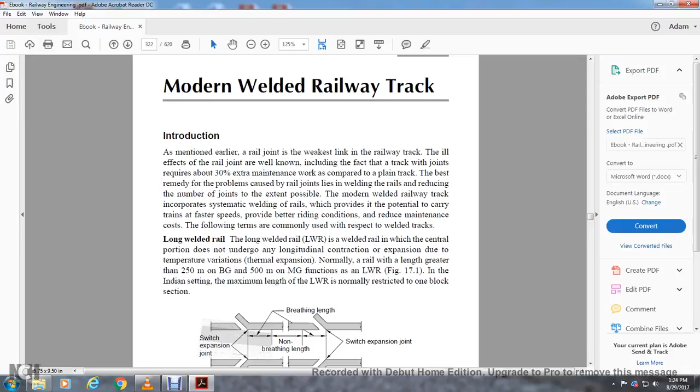Chapter 17, Modern Welded Railway Track.

Introduction. As mentioned earlier, the rail joint is the weakest link in the rail track, and the track with joints requires 30% extra maintenance work compared with the plain track.

The best remedy for the problems caused by rail joints lies with the welding of rails, which reduces the number of joints and incorporates systematic welding of rails, providing the potential to carry trains faster and provide better riding conditions.

This reduces maintenance cost. The following terms are commonly used with respect to welded tracks: Long Welded Rails, or LWR.

A Long Welded Rail is a welded rail whose central portion does not undergo any longitudinal contraction or expansion due to temperature variations or thermal expansion.

Normally, a rail length greater than 250 meters on broad gauge or 500 meters on meter gauge functions as a long welded rail. In the Indian setting, the maximum length of the long welded rail is normally restricted to one block section.

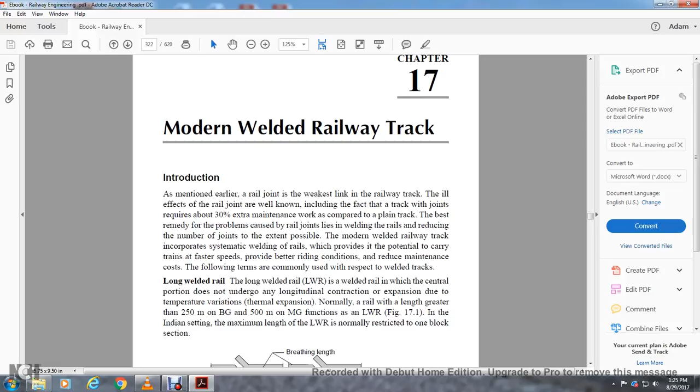Figure 17.1 shows the long welded rail, switch expansion joint, total length of the long welded rail, non-breathing length, breathing length, and switch expansion joint.

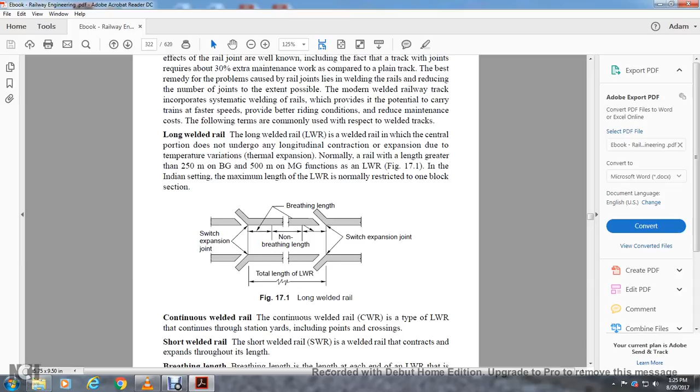Continuous Welded Rails, CWR, is a type of long welded rail that continues through station yards, including points and crossings. Short Welded Rails, or SWR, is welded rail which contracts and expands throughout its length.

The breathing length is the length at each end of the long welded rail that is subject to expansion and contraction on account of variations of temperature.

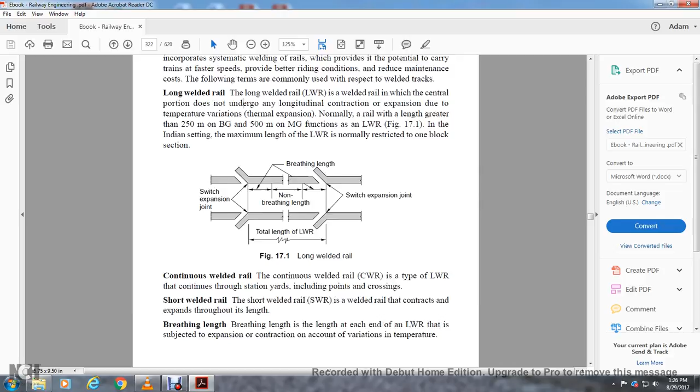Anchor length. The anchor length is the length of track that is required to resist the pull exerted by the rail tensor on the rails.

Switch Expansion Joint, or SEJ, is the expansion joint provided at the end of the long welded rail to permit the expansion and contraction of the adjoining breathing lengths due to temperature variation.

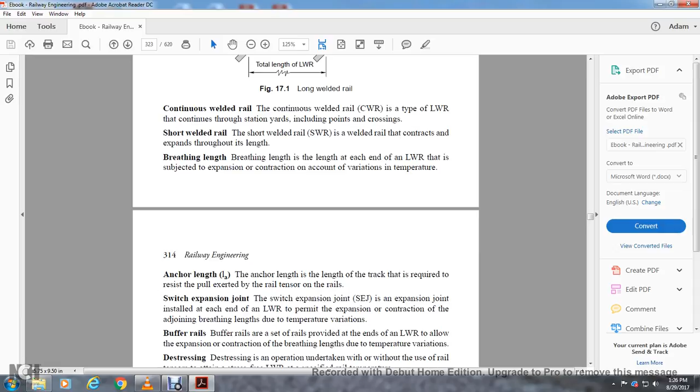Buffer rails are set rails provided at the end of the long welded rail to allow the expansion and contraction of the breathing length due to temperature variation.

Destressing is an operation undertaken, with or without using rail tensors, to attain stress-free long welded rails at a specified rail temperature.

Rail temperature: the temperature of the rail is recorded by an approved rail thermometer, at the site, different from the ambient or atmospheric temperature as reported by the meteorological department.

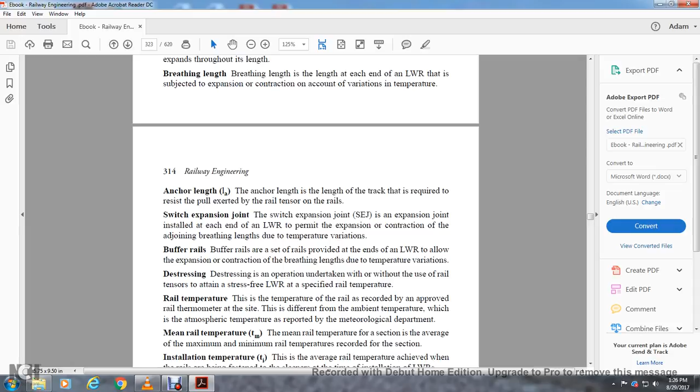Mean Rail Temperature, TM, means the rail temperature of the section, the average of the maximum and minimum rail temperatures recorded in the section. Installation Temperature is the average rail temperature achieved when the rail is fastened to the sleepers at the time of installing the long welded rail.

Standard Installation Temperature, or TS, is the installation temperature set at the standard gap of 6 millimeters provided at the fish joint plate.

Prevailing Rail Temperature, TP, is the average prevailing temperature of the rail at the time any operation connected with destressing is being carried out.

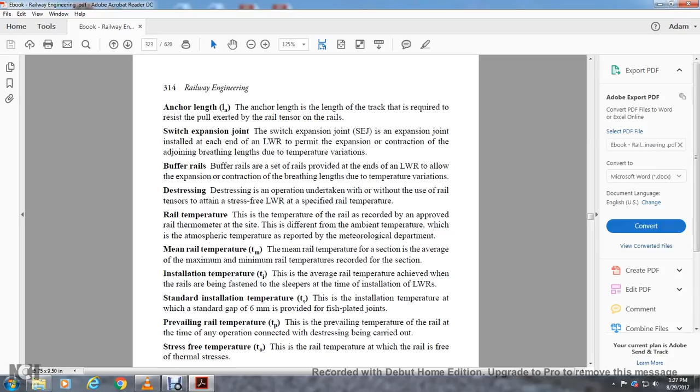Stress-Free Temperature, TO, is the rail temperature at which the rail is free of thermal stress.

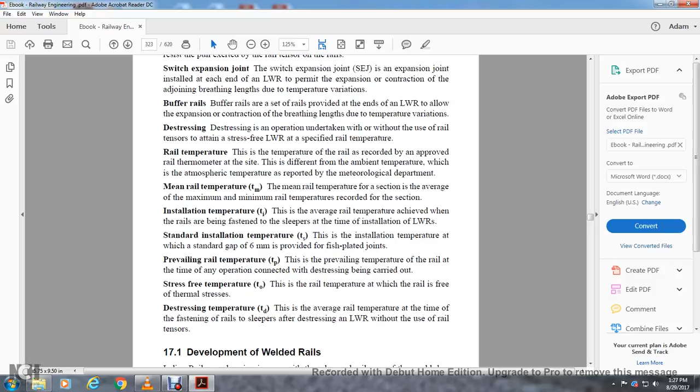Destressing Temperature, TD, is the average rail temperature at the time of fastening the rail to the sleeper during the destressing of the long welded rail without using rail tensors.

17.1 Development of Welded Rails.

Indian Railways, keeping pace with advanced railways of the world, adopted welded rails. Over the last few decades, development of welded rails has been necessary due to economical considerations coupled with the technical advantages of welded rail.

The fish-plated track with rails was initially welded in panels of 3, 5 and 10 rails. This development is called Short Welded Panels, or SWPs, or Short Welded Rails, SWRs.

This first stage of the development of welded rails continued, and in the course of time there was considerable achievement in track technology, and a new concept of locking up the stress of the rail, thereby resisting any change in the length of the rail, was developed.

According to this, long welded rails of varying length up to 1 kilometer were laid, eliminating rail joints to make the most of the advantage that welding offers.

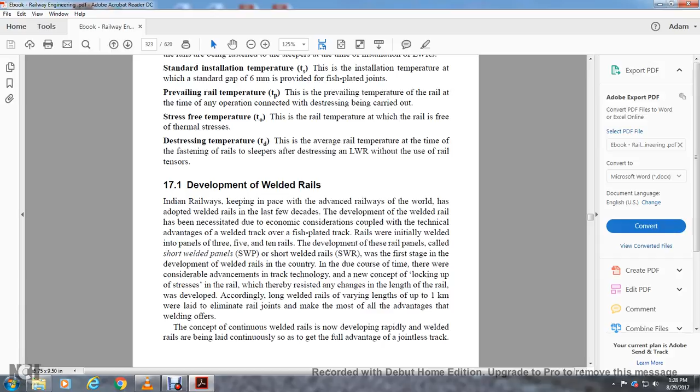The concept of continuous welded rails was then developed, and rapidly welded rails are being laid continuously so as to get the full advantage of the jointless track.

Theory of the long welded rails. It is well known that metal expands and contracts with the degree of temperature, undergoing thermal expansion. Rail expands and contracts depending on the variation of temperature.

Expansion of the rail is a function of the coefficient of linear expansion of the rail material, the length of the rail, and the variation of rail temperature. Normally a free rail will undergo alteration of length corresponding with the variation of temperature, but as the rail is fastened to the sleepers, which in turn are embedded in the ballast, this restraint on thermal expansion gives rise to locked-up thermal stress in the rail metal.

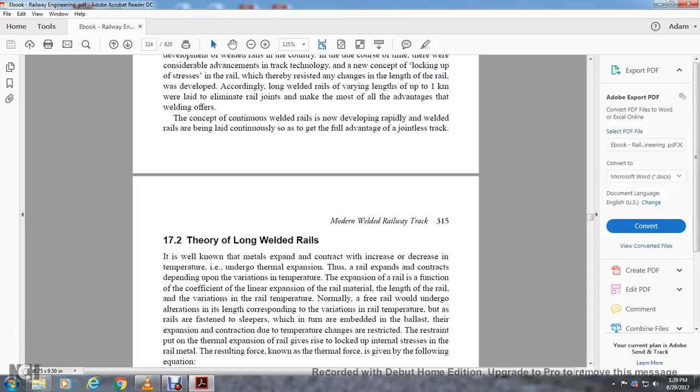The resulting force, known as the thermal force, is given by the equation P equals E times A times T. P is the force in tons. E is the modulus of elasticity of rail steel, 2.15 times 10 to the 6 kilograms per centimeter squared, or 2150 tons per centimeter squared. A is the cross section of steel in centimeters squared, which for a rail of 52 kilograms per meter is...

66.15 centimeters squared. alpha is the coefficient of linear expansion, 0.00001152 per degree Celsius, with temperature given in Celsius.

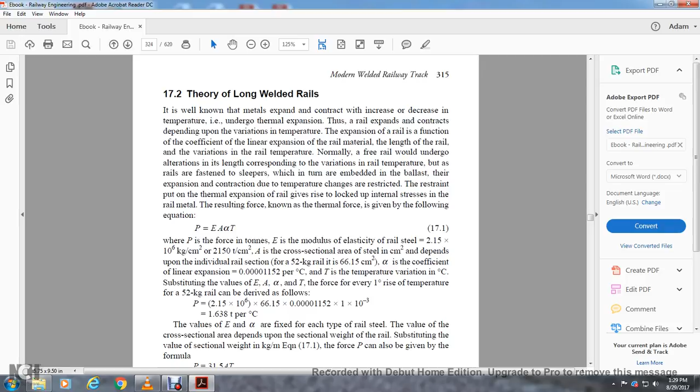Substituting the values of E and A, and T, the force for every 1 degree rise of temperature for a 52 kilogram rail can be derived as 1.638 tons per degree Celsius.

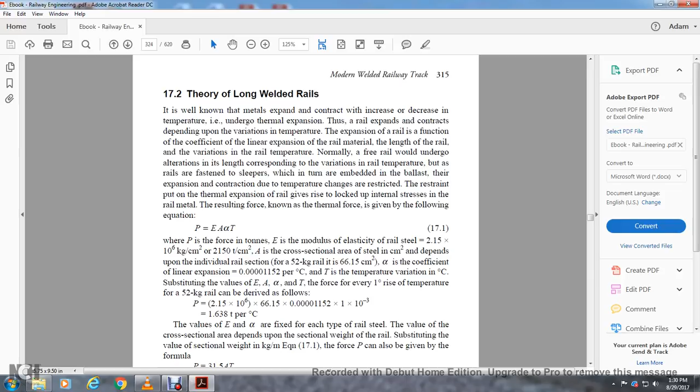Where P is the force in kilograms, A is the section weight in kilograms per meter, and T is the temperature variation in degrees Celsius, you get 1.638 tons per degree Celsius.

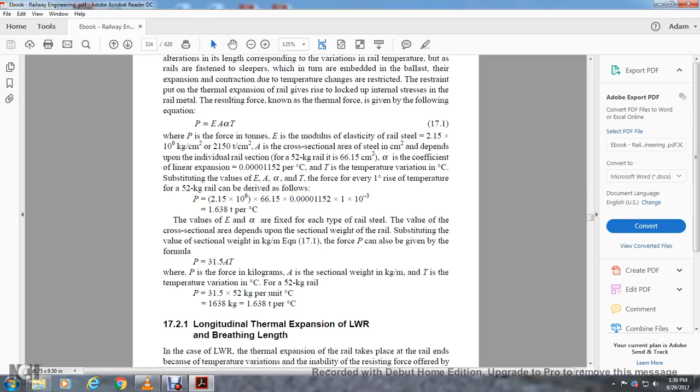Longitudinal thermal expansion of the long welded rail and breathing length. In the case of a long welded rail, thermal expansion of the rail takes place at the rail end because of temperature variation and the inability of the resisting force of the rail and ballast to overcome the same.

The long welded rail continues to expand at its ends up to a particular length, with adequate resisting force developed toward the center of the stretch, until it finally reaches the particular length at its end where the resistance of the track structure becomes equal to the thermal forces created as a result of the temperature variation.

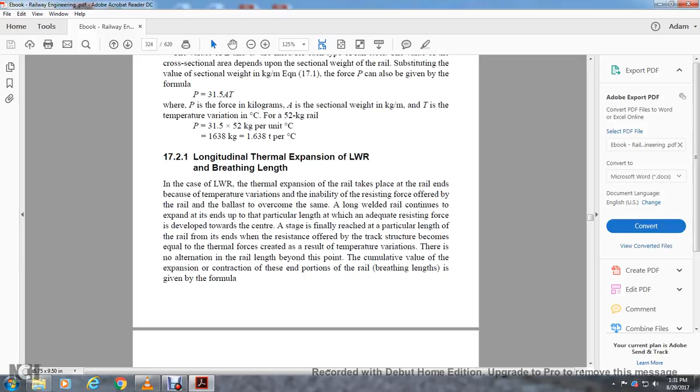delta L equals L times A times T divided by 2, where delta L is the amount of expansion or contraction of the rail, L is the breathing length of the rail, alpha is the coefficient of thermal expansion of the rail, and T is the variation in temperature.

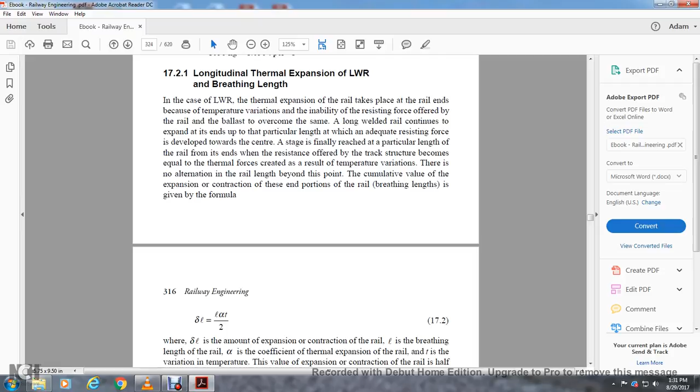The value of expansion or contraction of the rail is half the value that would have been attained by the rail if it had been free to expand without the ballast resistance.

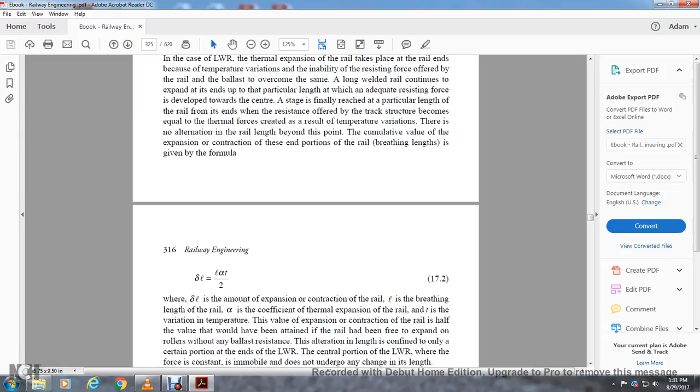Alteration of length is confined to only certain portions of the long welded rail; the center portion of the long welded rail, where the force is constant, is immobile and does not undergo any change in length.

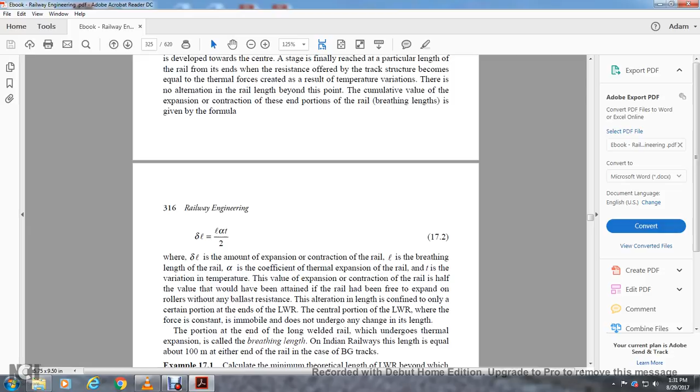The end portion of the long welded rail which undergoes thermal expansion is called the breathing length. On the Indian Railways, this length is equal to about 100 meters at either end of the rail in the case of broad gauge tracks.

Alright, example 17.1. Calculate the minimum theoretical length of the long welded rail beyond which the center portion of the rail will not be subject to thermal expansion, given the following data.

The cross-sectional area of the 52 kilogram section is 66.15 centimeters squared. The coefficient of thermal expansion of rail steel is 11.5 times 10 to the negative 6 per degree Celsius, for a temperature variation of 30 degrees Celsius. The modulus of elasticity of rail steel is 2 times 10 to the 6 kilograms per centimeter squared.

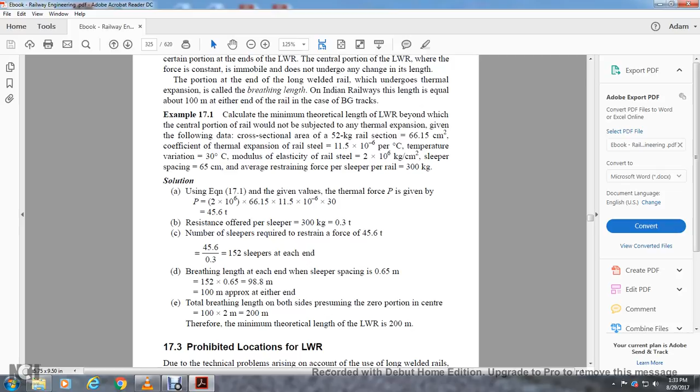The total breathing length for both sides, presuming a zero-movement portion in the center, is 100 times 2 meters, which is 200 meters. Therefore, the minimum theoretical length of the long welded rail is 200 meters.

Section 17.3: Prohibited locations for long welded rail. Due to technical problems arising from the use of long welded rails, the Indian Railway has specified locations where laying long welded rail is prohibited. These locations are listed below.

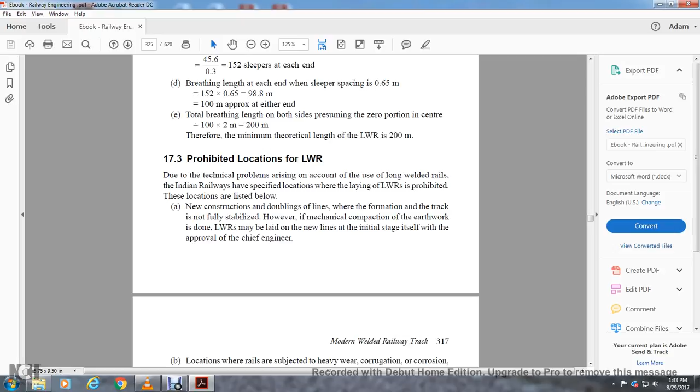A. New construction or doubling lines where the formation of the track is not fully stabilized. However, with mechanical compaction of the earthwork is done, long welded rails may be laid on new lines in the initial stage, itself with the approval of the chief engineer.

B. Locations where rails are subject to heavy wear, corrugation, or corrosion requiring frequent renewal. Locations with weaker formation, where track deformation could lead to buckling. Locations with formation susceptibility to pumping of ballast likely to get heavily contaminated, thereby necessitating frequent opening of the track, the screening of the ballast.

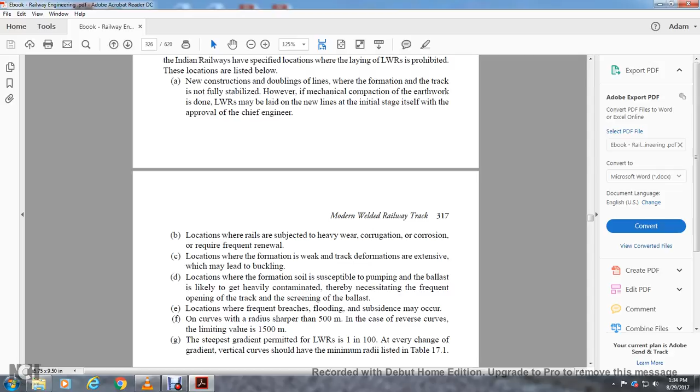The steepest gradient permitted for the long welded rail is 1 in 100, and every change of gradient vertical curve should have the minimum radius given in table 17.1.

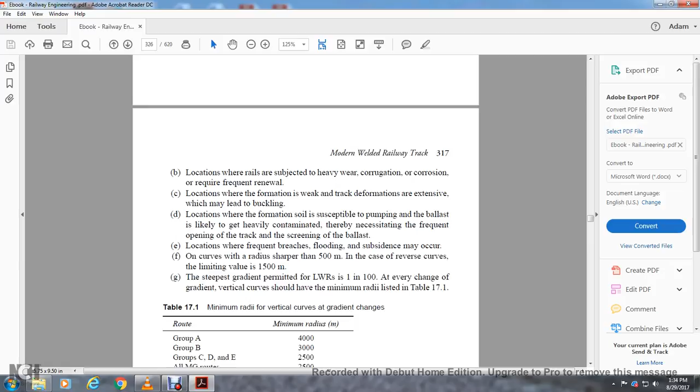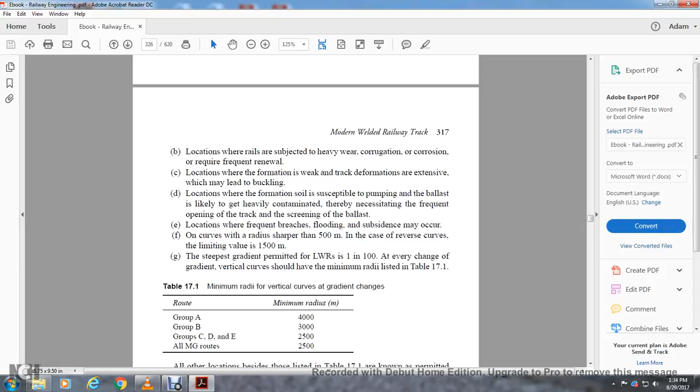Group A has a minimum radius of 4,000 meters. Group B has a minimum radius of 3,000 meters. Groups C, D, and E have a minimum radius of 2,500 meters, and all meter gauge routes have a minimum radius of 2,500 meters.

Section 17.4: Track structure of a long welded rail. The minimum length required for the rail's functioning as a long welded rail depends upon the range of temperature variation.

Normally a rail length of about 100 meters on broad gauge and 150 meters on meter gauge is subject to thermal expansion within the rail. A length of more than 200 meters on broad gauge and 300 meters on meter gauge is generally necessary for it to function as long welded rail.

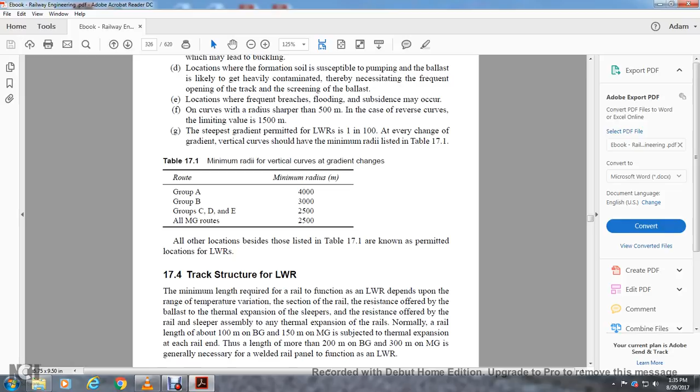Panel functioning is limited as long welded rail. Section 17.4.1: Formation. The formation should not pose any problems with the long welded rail.

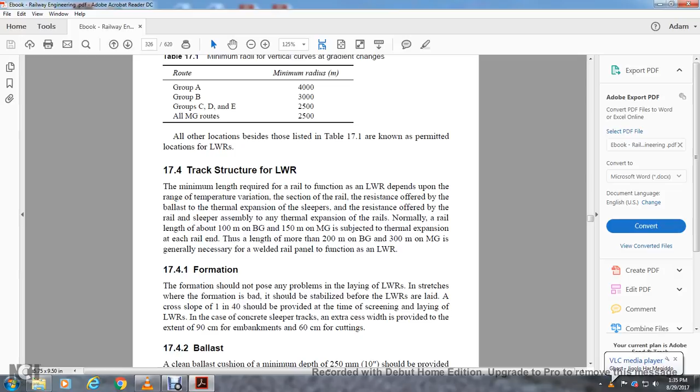Stretches where the formation is bad: if the formation is bad, it should be stabilized before the long welded rail is laid, as a cross slope of 1 in 40 should be provided at the time of screening for the long welded rails. In case of concrete sleeper tracks, extra width should be provided to the extent of 90 centimeters for embankments and 60 centimeters for cuttings.

Section 17.4.2: The ballast. A clean ballast cushion of minimum depth of 250 millimeters, or 10 inches, should be provided at the bottom of the sleeper for long welded rails in order to increase resistance.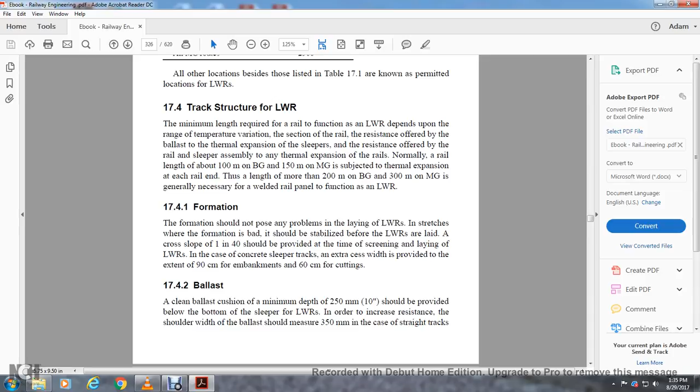The shoulder width of the ballast should be measured at 350 millimeters for straight tracks, and on the inside of a curve 500 millimeters. On the outer end of the curve, the ballast shoulder should be humped up to a height of 150 millimeters on both shoulders.

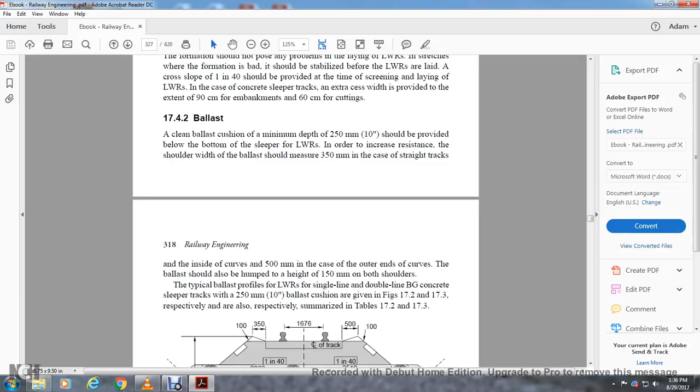Typical ballast profiles of long welded rail for single line and double line broad gauge concrete sleeper tracks with 250 millimeter (10 inch) ballast cushion construction are shown in figures 17.2 and 17.3, summarized in tables 17.2 and 17.3 respectively.

Figure 17.2 shows the ballast profile of a single line long welded rail track, all dimensions in millimeters: 6,100 millimeters from embankment to embankment, and 5,490 millimeters for cutting.

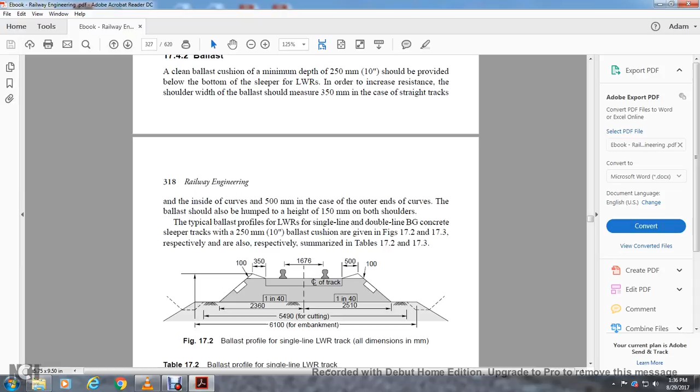2360 and 2510, 1 in 40, 100 millimeters, 100 millimeters, 350 millimeters from the sleeper, 1676 from the inside gauge of the track, 500 millimeters off the end of the track, 100 millimeter slope. Ballast profile, single line, broad gauge, wood and steel, concrete, wood, meter gauge, ST, CST/9, and concrete.

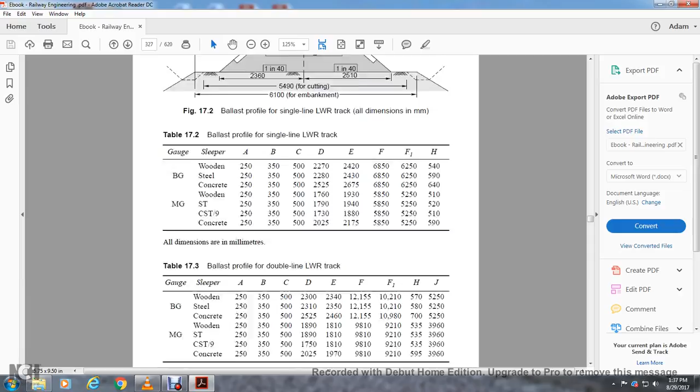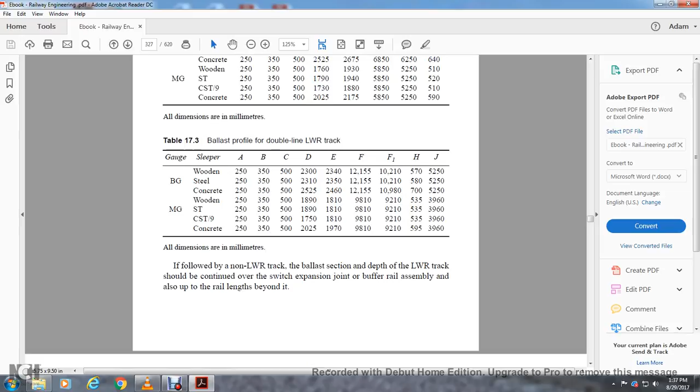17.3: ballast profile, double line, welded track, broad gauge, wood, steel, concrete, wood, and meter gauge, ST, CST/9, and concrete. If followed by a non-long welded rail track, the ballast section at the ends should be continued over the switch expansion joint, buffer assembly, and also up to the rail lengths beyond it. 17.3 shows the ballast in millimeters for a double line long welded rail track, 10,210 millimeters embankment.

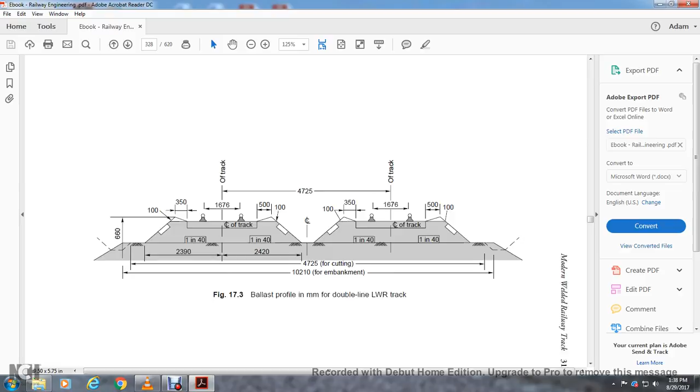17.4.3 Sleepers prescribed in long welded and continuous welded rail. Sleepers prescribed in the long welded rail and continuous welded rail are listed below.

Broad gauge concrete sleepers with elastic fittings, untreated or hard (U category) wooden sleepers with fastening, for speeds not exceeding 160 kilometers an hour. Steel trough sleeper with elastic fitting for speeds not exceeding 130 kilometers an hour, as a measure up to 160 kilometers an hour. However, the interim measure permits steel sleepers with loose jaw keys and untreated wooden sleepers. The CST sleeper is also permitted.

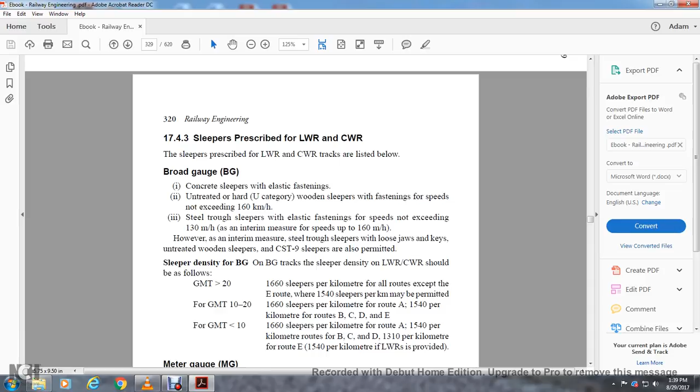Sleeper density of the broad gauge track for long welded rail and continuous welded rail is as follows: greater than 20 gross million tons, 1,660 sleepers per kilometer. All routes except E route, 1,540 sleepers per kilometer may be permitted. For gross million tons from 10 to 20, 1,660 sleepers per kilometer for route A, 1,540 per kilometer for routes B, C, D, and E. Less than 10 gross million tons, 1,660 sleepers per kilometer for route A, 1,540 for routes B, C, and D, 1,310 per kilometer for route E, 1,540 per kilometer if long welded rail is provided.

Meter gauge: the prescribed sleepers for meter gauge are concrete sleepers, steel troughs, durable wooden sleepers, and CST9 sleepers. For sleeper density on meter gauge, a meter gauge track should have 1,540 sleepers per kilometer standing at 100 kilometers per hour, with 1,660 sleepers per kilometer for speeds above 100 kilometers an hour, for existing long welded and continuous welded rail.

The decision of retaining the existing sleeper density is taken by the Chief Engineer.

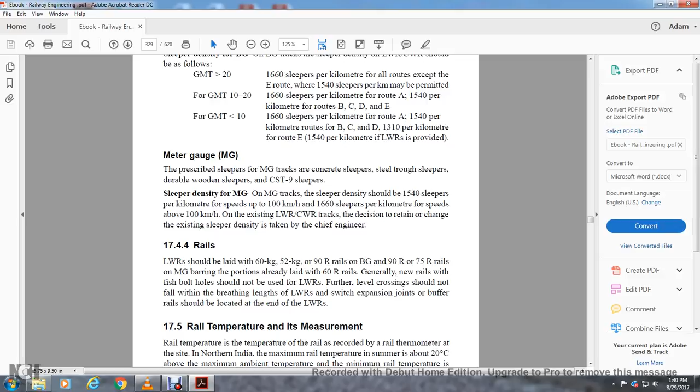17.4.4 Rails. Long welded rails should be laid with 60 kg, 52 kg, or 90R rails for broad gauge, and 90R, 75R, or S55 rail for meter gauge, barring the portion already laid with 60R rails. Generally, new rails with fishbolt holes should not be used in long welded rail. Further, level crossings should not be provided within the breathing length of the long welded rail. Switch expansion joints and buffer rails should be located at the ends of the long welded rails.

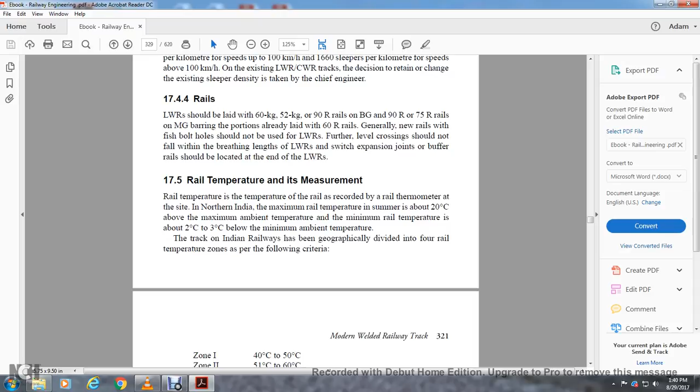17.5 Rail temperature measurement. The rail temperature is recorded with a rail thermometer. The maximum rail temperature in northern India in summer is about 20 degrees Celsius above the maximum ambient temperature. The minimum rail temperature is about 2 to 3 degrees Celsius below the minimum ambient temperature. The Indian rail track is geographically divided into 4 rail temperature zones according to the following criteria.

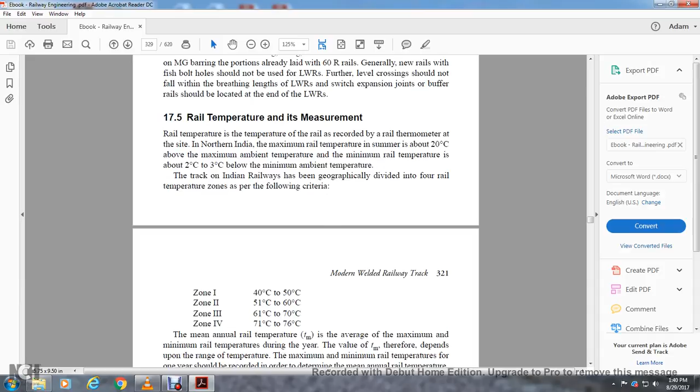Zone 1: 40 to 50 degrees Celsius. Zone 2: 51 to 60 degrees Celsius. Zone 3: 61 to 70 degrees Celsius. Zone 4: 71 to 76 degrees Celsius.

The annual rail temperature (TM) is the average of the maximum and minimum rail temperature recorded during the year, and its value depends upon the temperature range. The maximum and minimum rail temperatures for one year should be recorded to determine the annual rail temperature, although a record of 5 years is preferable. Rail thermometers are used to measure rail temperature. The different types of thermometers available on Indian railways are: embedded type, dial type, and continuous recording type. The most commonly used among these is the embedded type thermometer.

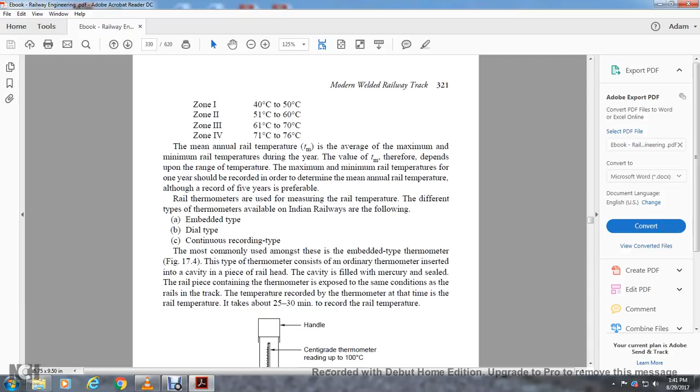The embedded type thermometer consists of the ordinary thermometer inserted into the cavity of a piece of rail head. The cavity is filled with mercury and sealed. The rail piece containing the thermometer existing in the same conditions as the rail track. This thermometer records the rail temperature, and it takes about 25 to 30 minutes to record it.

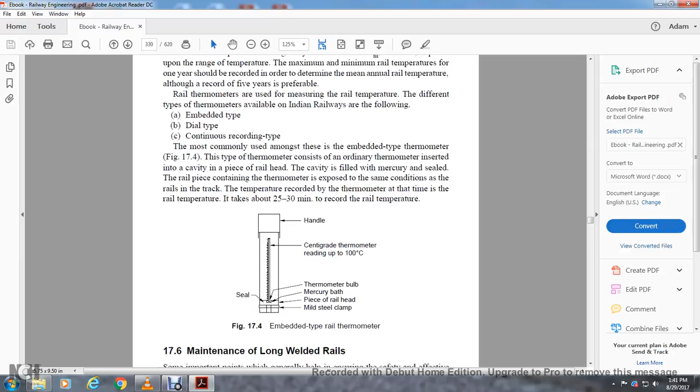Figure 17.4 shows the embedded type of rail thermometer. The thermo bulb is sealed in a mercury bath in a piece of rail head made of mild steel, centigrade, with the thermometer reading up to 100°C in the handle.

Now for maintenance of long welded rails. Some important points for ensuring the safety and effective maintenance of long welded rails are as follows: a well-compacted ballast bed should be available below the sleepers to give adequate lateral and longitudinal resistance to the track, in order to prevent buckling or excessive alteration of sleeper spacing in the long welded rail.

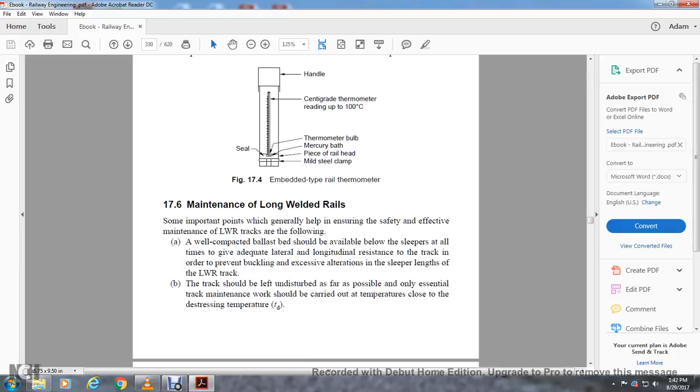The track should be left undisturbed as far as possible. Only essential track maintenance work should be carried out at temperatures close to the de-stressing temperature.

The track should preferably be maintained mechanically with on-track tamping machines. At no time during manual maintenance should more than 30 sleeper spaces be open in a continuous stretch, between two stretches of 30 sleeper length that are fully boxed.

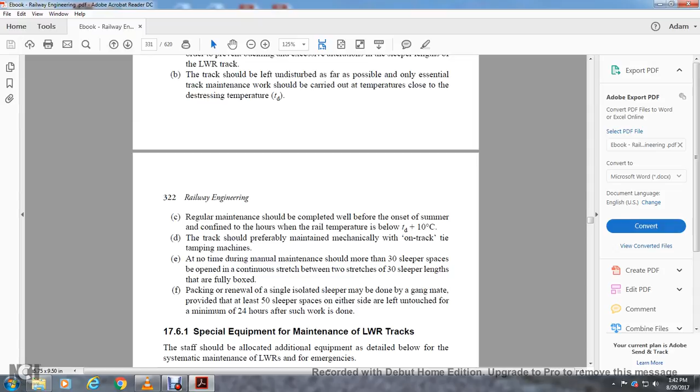Packing or renewal of a single isolated sleeper may be done by a gang mate, provided at least 50 sleeper spaces on either side are left untouched for a minimum of 24 hours after such work is done.

17.6.1 Special equipment for maintenance of long welded rail. Staff should be provided with additional equipment detailed below for systematic maintenance of long welded rail, for emergencies and additional equipment of the gang.

The prepared jaw fish plate with a special clamp, 30mm long weld closure space, rail thermometer marked with the temperature range, and special 1 meter long fish plate with clamps.

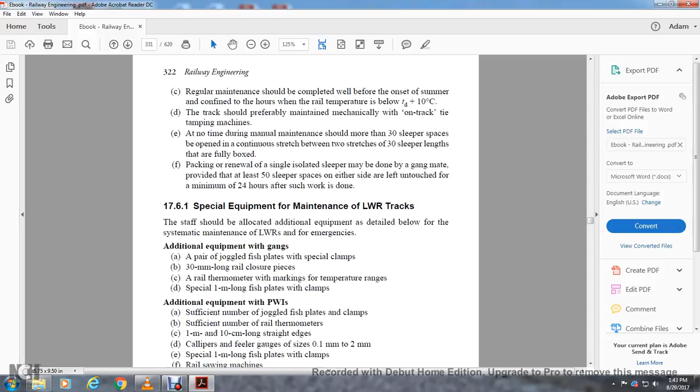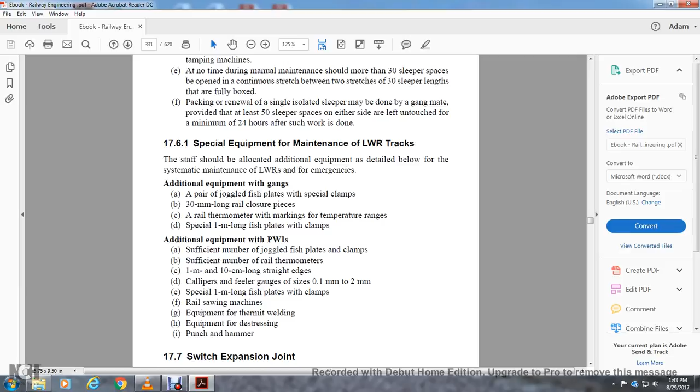Additional equipment for PWIs, the Permanent Way Inspectors, includes a sufficient number of joggled fish plates and clamps, sufficient number of rail thermometers, 1m, 10cm long straight edge caliper, feeler size gauge of 0.1mm to 2mm, special 1 meter long fish plates with clamps, rail sawing machines, equipment, thermite welding equipment, de-stressing, punching, and a hammer.

17.7 Switch expansion joint. The switch expansion joint is a device installed with a long welded rail to allow thermal expansion, presuming a breathing length of 100 meters on broad gauge track.

For a maximum temperature variation of plus or minus 35 degrees Celsius from the mean temperature over the breathing length, would shift or move by approximately 20 plus or minus millimeters from its mean position.

The expansion joint design accommodates a total length modification of plus or minus 60 millimeters. An extra allowance has been made to account for factors such as fractures in the rail.

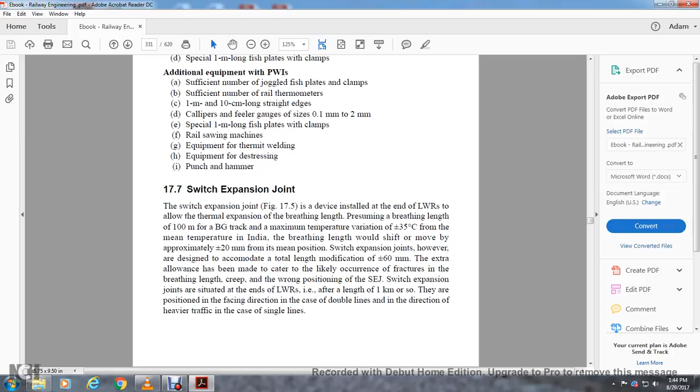Figure 17.5 shows the switch expansion joint, with the welded gapless joint, the mean position of the tongue rail, the mean position of the stock rail, and the reference rail post.

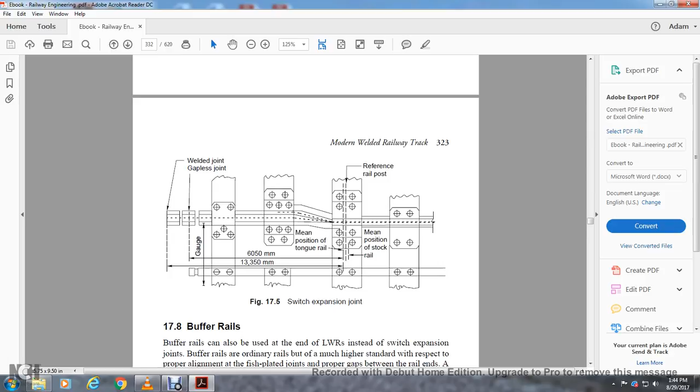17.8 Buffer rail. Buffer rails can also be used at the end of a long welded rail instead of a switch expansion joint. The buffer rails are ordinarily laid to a much higher standard with respect to proper alignment, with fish-plated joints.

A proper gap is maintained between the rail joint ends, with a gap of 7.5 millimeters left at each end of the buffer joint. The ends of the buffer rails should be even against each other, to permit free thermal expansion and contraction of the buffer.

The rails are laid on wooden sleepers with MS canted bearing plates, 22 millimeters diameter rail screws, with the portion of the long welded rail that bears, and the buffer rail should be maintained by measured shovel packing.

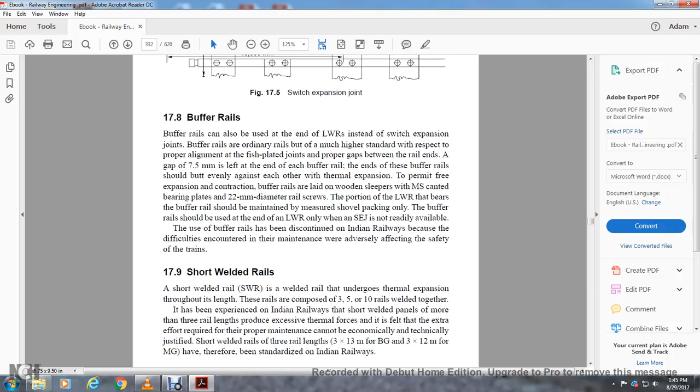Buffer rails should only be used at the end of long welded rail when a switch expansion joint is not readily available.

The use of buffer rails, has been discontinued on Indian Railways, because of the difficulties encountered with their maintenance, would adversely affect the safety of the train.

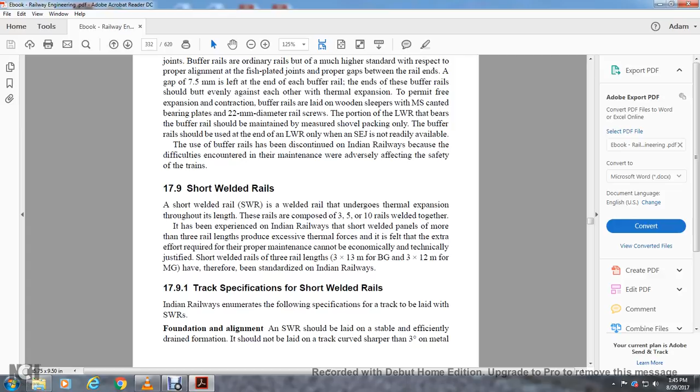Short welded rails (SWRs) are welded rails that undergo thermal expansion throughout their length, encompassing 3, 5, and 10 rails welded together. Expansion of short welded panels of more than three rail lengths produces excessive thermal force. This effect requires proper maintenance but cannot be economically or technically justified. Short welded rails of 3 lengths - 3 times 13 meters for broad gauge, 3 times 12 meters for meter gauge - have been standardized on Indian Railways.

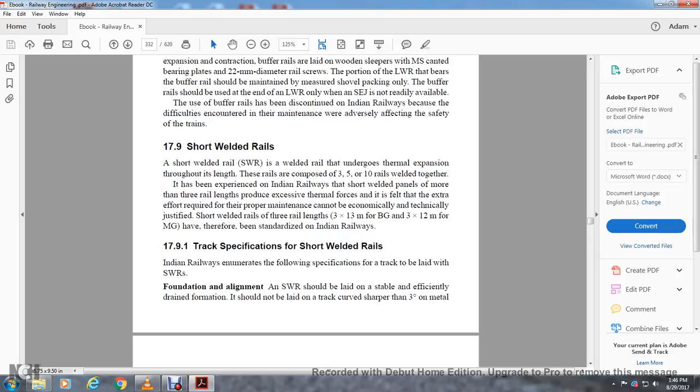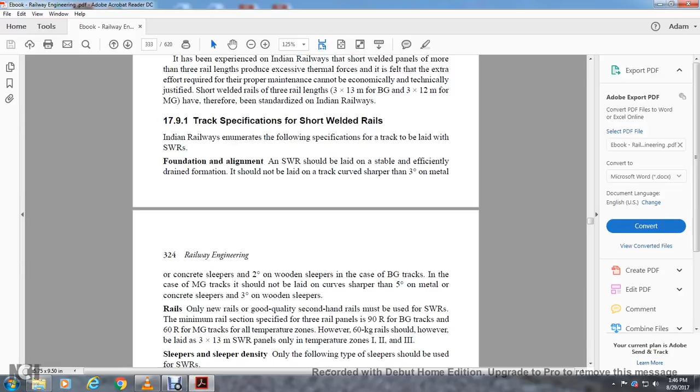Section 17.9.1 covers track specifications for short welded rails. Indian Railways enumerates the following specifications for track to be laid with short welded rails. The foundation alignment should be laid on a stable, efficiently drained formation, and should not be laid on curves sharper than 3 degrees on metal or concrete sleepers, or 2 degrees on wooden sleepers, for broad gauge track. For meter gauge track, it should not be laid on curves sharper than 5 degrees on metal or concrete sleepers, and 3 degrees on wooden sleepers.

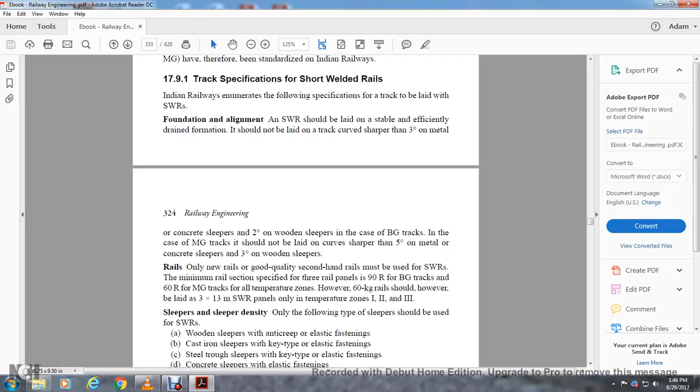Regarding sleeper density, one of the following types of sleepers should be used for short welded rails: wooden sleepers with anti-creep elastic fittings, cast iron sleepers with key-type elastic fittings, steel trough sleepers with key-type elastic fittings, or concrete sleepers with elastic fittings.

Wooden sleepers should preferably be used at all fishplated joints with short welded rails, or metal sleepers provided with MS bearing plates with non-anti-creep fastenings should be laid. The minimum sleeper density specified for broad gauge and meter gauge track is M+4, except for 60 kilogram rails on broad gauge track, which should be M+7.

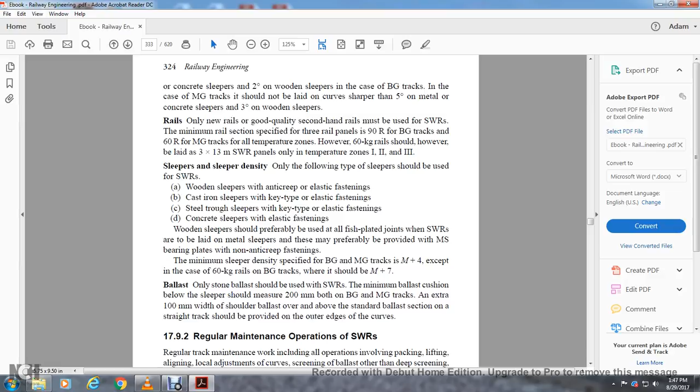For ballast, stone ballast should be used in short welded rail track. The minimum ballast cushion below the sleeper should be 200 millimeters for both broad gauge and meter gauge, with an extra 100 millimeter width of shoulder ballast, over and above the standard ballast section on straight track, provided on the outer edge on curves.

Section 17.9.2 covers regular maintenance operations on short welded track. Regular track maintenance work includes all operations involved in packing, lifting, and lining, with local adjustment of curves, and screening ballast other than deep screening.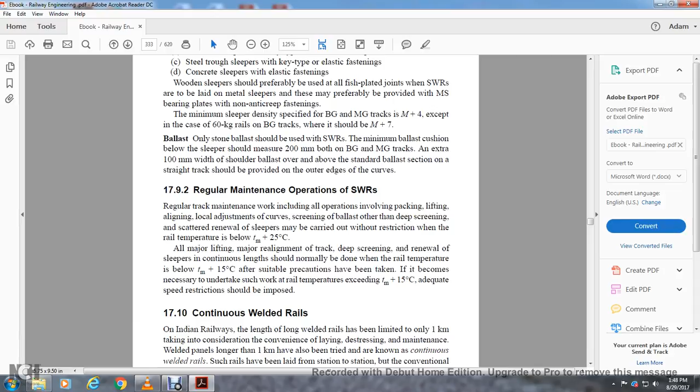Scattered renewal of sleepers may be carried out without restriction when the rail temperature is below TM plus 25 degrees Celsius. Major lifting, realignment of track, deep screening, or continuous sleeper renewal should normally be done when rail temperature is below TM plus 15 degrees Celsius. If, after suitable precautions, it becomes necessary to undertake such work at temperatures exceeding TM plus 15 degrees Celsius, adequate speed restrictions should be imposed.

Section 17.10 covers continuous welded rail. On Indian Railways, the length of welded rails has been limited to 1 kilometer, taking into consideration convenience of laying, destressing, and maintenance. Welded panels longer than 1 kilometer have also been treated as continuous welded rails. Such rails have been laid at stations, but conventional insulation joints and turnouts have been left out as isolated switches with expansion joints.

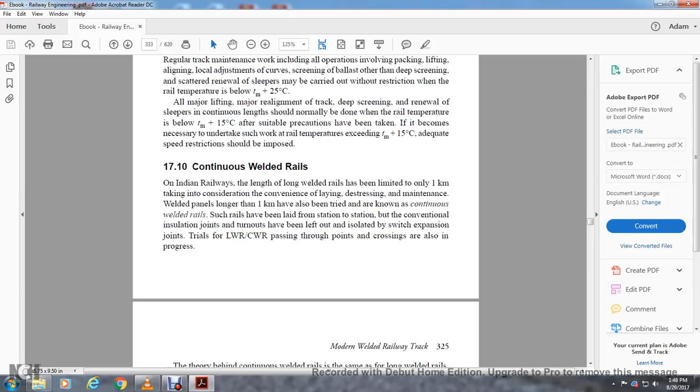Long welded rails and continuous welded rail passing through points or crossings also progress. The theory behind continuous welded rail is the same as for long welded rails. Once the concept of locking the longitudinal thermal force is accepted, there is no reason the length of the long welded rail should be limited to only 1 kilometer.

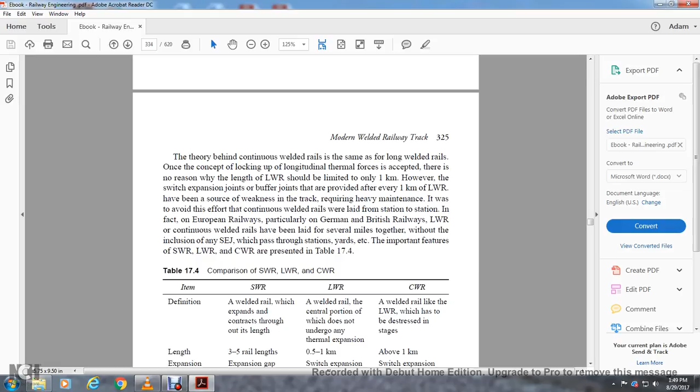Switch expansion joint buffer joints are provided every 1 kilometer of long welded rail to avoid the source of weakness requiring heavy maintenance from station to station. European railways, particularly German and British railways, have laid long welded rail and continuous welded rail for several miles together without switch expansion joints through station yards. This is an important feature of short welded rail, long welded rail, and continuous welded rail, covered in table 17.4.

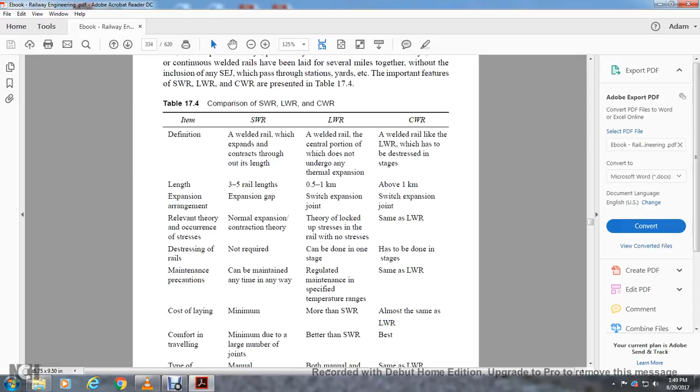1711, buckling of the track.

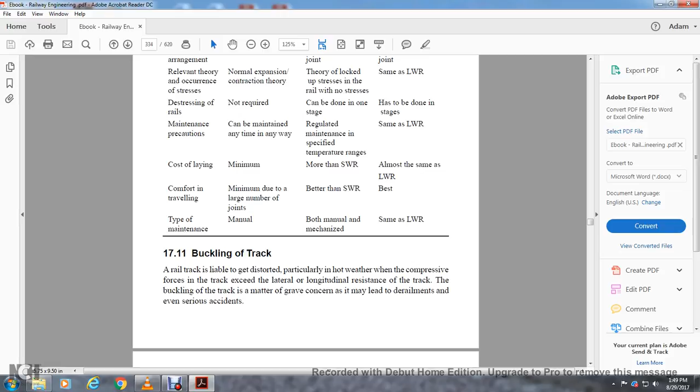Rail track is liable to distort, particularly in hot weather. The compressive force exerted on the rail versus the lateral resistance of the track is a measure of buckling, a grave concern that can lead to derailment or even serious accidents.

1711-1. Track can be buckled due to the following reasons: inadequate lateral resistance due to deficient ballast, ineffective or missing fastenings, and destressing or maintaining the track outside of the specified rail temperature range, especially in hot weather.

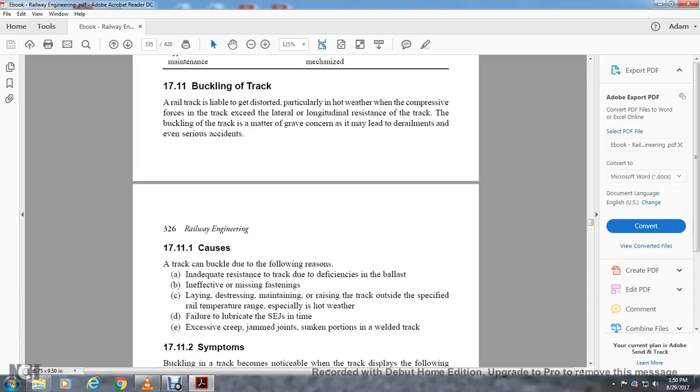Failure to lubricate the special switch expansion joints in time, and excessive creep at joints and sunken portions of the welded track.

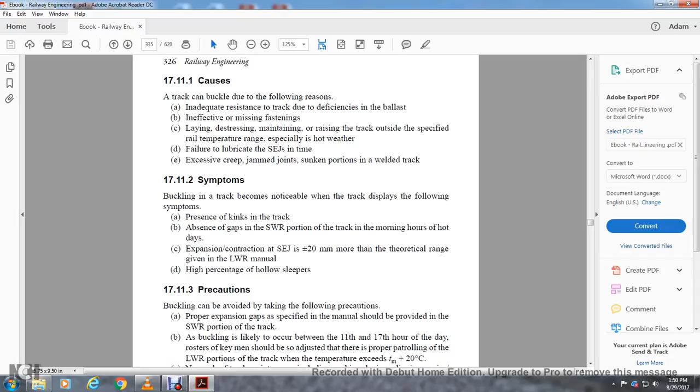1711-2. Buckling of the track may be noticed by the following symptoms: presence of a kink in the track, absence of gaps at short welded rail portions in the mornings, and expansion or contraction at switch expansion joints of plus or minus 20 millimeters more than the theoretical range specified in the long welded rail manual.

Buckling can be avoided by taking the following precautions: proper expansion gaps as specified in the manual should be provided at short welded rail portions of the track.

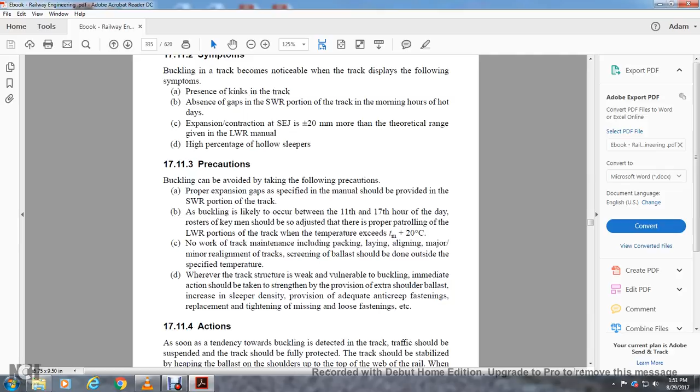Wherever the track structure is vulnerable to buckling, extra measures should be taken such as strengthening provisions, extra shoulder ballast, increasing sleeper density, providing adequate anti-creep fastenings, and replacing or tightening missing or loose fastenings, etc.

1711-4, actions. As soon as a tendency towards buckling is detected in the track, traffic should be suspended and the track should be fully protected. The track should be stabilized by heaping ballast shoulder up to the top of the web of the rail. When buckling takes place, traffic should be suspended.

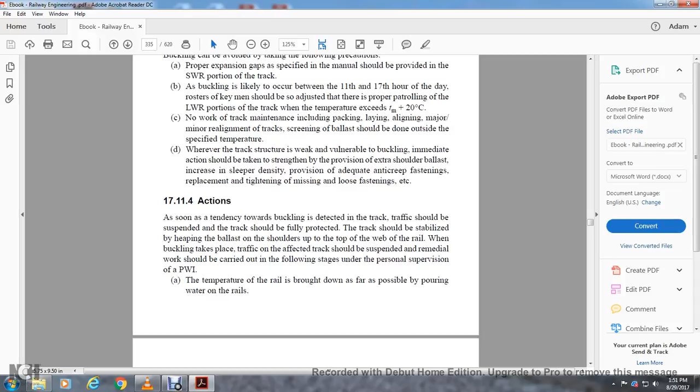Remedial work should be carried out in the following stages under the personal supervision of the inspector: the temperature of the rail is brought down as far as possible by pouring of water on the rails, followed by emergency or permanent rail repairs, with destressing carried out as specified in the long welded rail manual.

In this case, for fish-plated or short welded rails, a gentle reverse curve may be provided to the rear of the buckled track to relieve the stress.

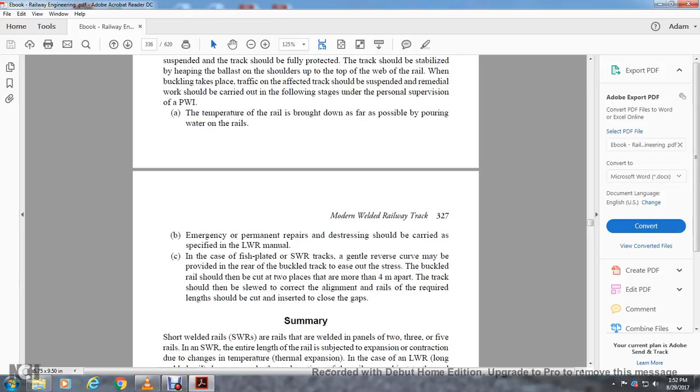The buckled rail can then be cut out at two places more than 4 meters apart. The alignment of the rails should be smoothed and corrected, and a rail of the required length should be cut and inserted to close the gap.

Short welded rails: a rail welded in a panel of 2 to 5 rails. In short welded rail, the entire length of the rail is subject to expansion and contraction due to changes in temperature, or thermal expansion.

In the case of long welded rails, however, only the end portions of the rail are subject to thermal expansion. The center portion of the long welded rail remains clamped, without undergoing any change in length.

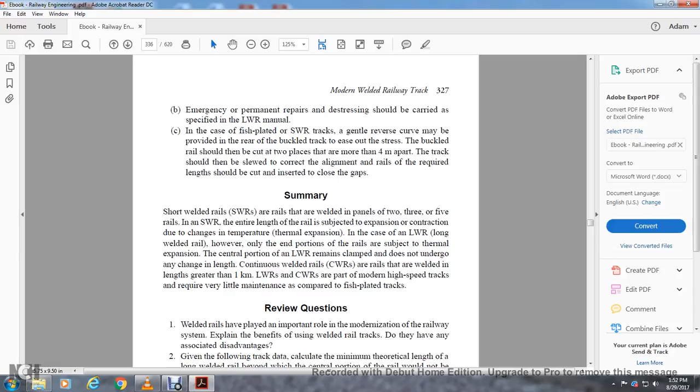Continuous welded rails are rails welded to a length greater than 1 kilometer. Long welded rails and continuous welded rails, part of modern high-speed tracks, require very little maintenance compared to fish-plated tracks.

Chapter 18, Track Maintenance.